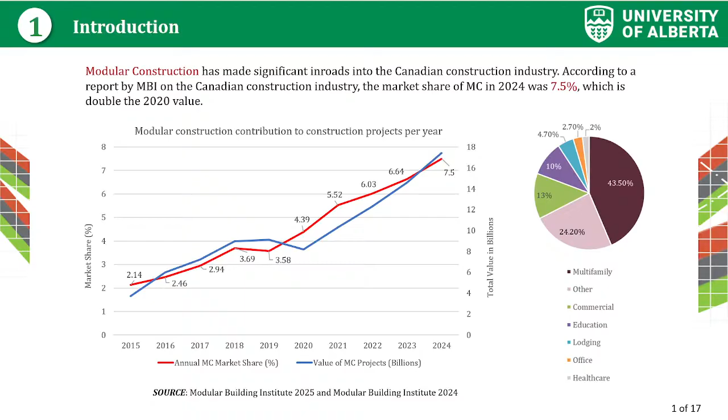To start, modular construction has made great contribution to the Canadian construction industry. According to the latest Modular Building Institute report, the market share of modular construction has reached 7.5%, almost double the value recorded in 2020. But we usually look into how we can increase this ratio from 7% to a greater value. Through the literature, we identified a lot of obstacles that can slow the adoption of modular construction.

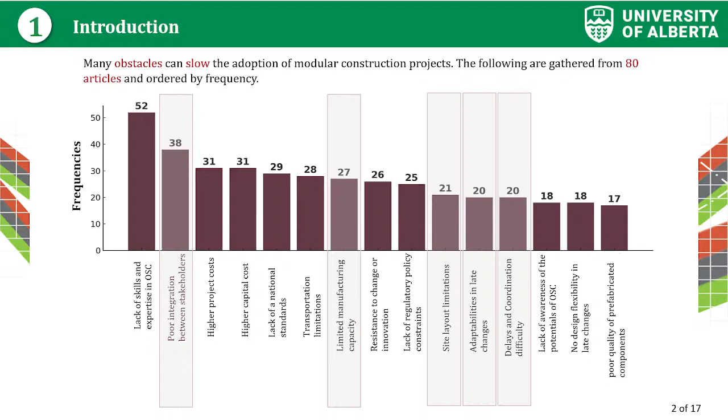Based on the frequencies, we have ranked these obstacles. We can see obstacles related to limited manufacturing capacity, coordination problems, and poor integration between the supply chain stages. All of these challenges contribute to the deviation from the actual schedule of modular construction from the planned schedule.

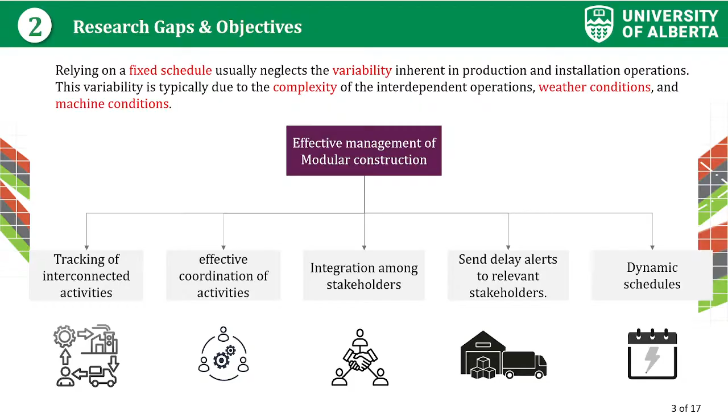In this sense, if we rely on fixed schedules, we will most likely face deviation. According to the literature, to have better monitoring of modular construction progress, we need to have tracking of the interconnected processes. We need effective communication, integration between the supply chain stages, dynamic scheduling, alerts for delays, and so on.

To this end, this paper addresses on-site rapid assembly. This technology has already gained significant traction in many countries like the United States, Singapore, China, and Australia. By leveraging highly standardized designs and factory-based production, modular construction not only supports green and sustainable construction development, but also helps the development of the construction sector.

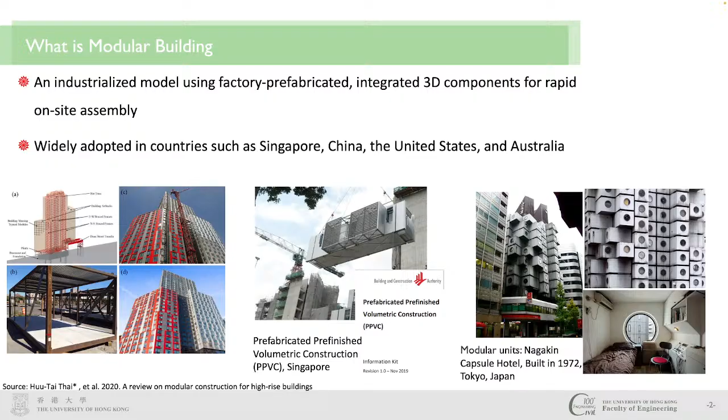In Hong Kong, this technology is officially known as Modular Integrated Construction, or MIC for short. The government has been promoting MIC since 2017, primarily to tackle two pressing challenges: housing shortage and an aging construction workforce.

And the result has been impressive. This method typically shortens construction cycles by 30 to 50%, while also significantly reducing labor cost.

The widespread adoption of MIC is already reflected in large-scale public housing developments, as well as specialized high-rise structures, all of which benefit from faster project efficiency and enhanced site safety. To give you a few project examples, such as the HKU student hostel, the Sunlight Market, and the primary school.

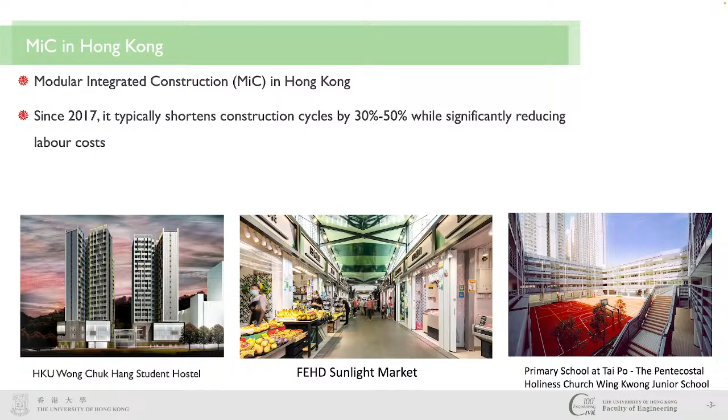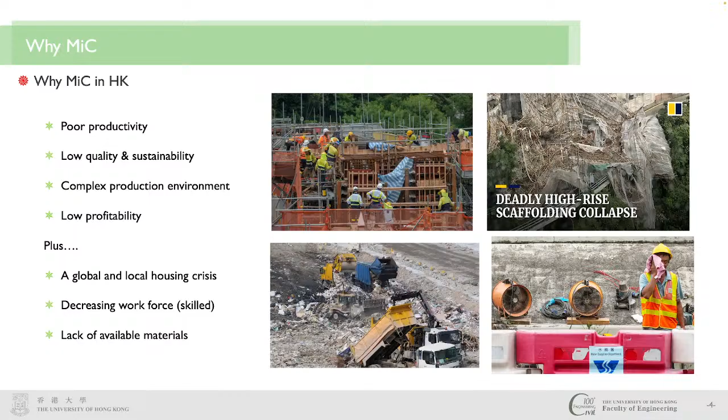So why is MIC promoted and adopted in Hong Kong on a large scale? Because the traditional construction industry is struggling with poor productivity, low quality, sustainability issues, a complex production environment, and low profitability. On top of that, we are facing a global and local housing crisis, a shrinking skilled workforce, and material shortages. So MIC can address all of these challenges head on.

So we can introduce our research aim and objectives. The overall aim is to use statistics-based models to calculate the reliability of modular building systems. Specifically, we want to capture the uncertainty and dependency within the building systems to predict the failure mode and the degradation process.

To achieve this, we have broken the work down into three main objectives. First, we classify the subsystems of a modular building and develop models to describe the degradation process of MIC buildings. Second, we identify the main failure modes in MIC buildings. For each mode, we look at the associated system, the failure indicators, and the types of failure. Finally, we collect real-world data to estimate the model parameters.

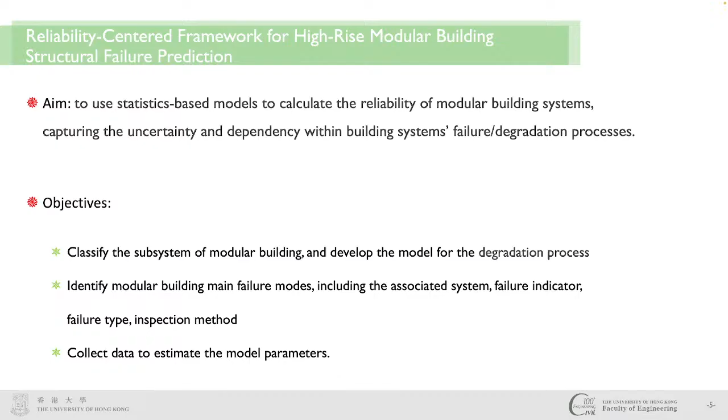First, we divide the subsystem performance into two types: structural and non-structural. Non-structural parts degrade faster but may have minor failure consequences. Structural parts degrade slower but may result in more severe failure damage.

We focus on three critical structural subsystems. First, module structural components - that's the boxes including frame, slabs, and walls. Second, the inter-module connections, which bring the boxes together. And third, load transfer zones, which transfer the zone load to the foundation.

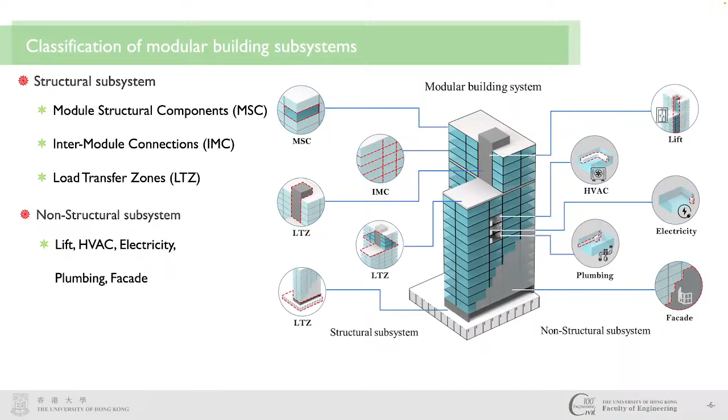Then we define a clear state space to map the component's health. We break the continuous deterioration process into discrete observable states from S0 intact to S4 failure. S4 failure state is an absorbing state - it means once it's reached, the module stays there unless restoration occurs.

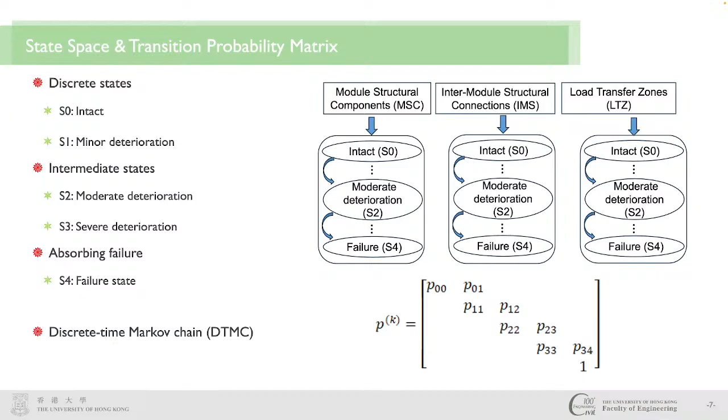The left figure shows the three structural subsystems degrading independently, each with their own states and transitions. But the structural subsystems can be interrelated, so the deterioration rate of each subsystem adjusts based on the health of the others. The primary dependency is how modular structural component states affect the inter-modular connection deterioration. There are also secondary feedback effects: connection conditions stress the modules themselves, captured by alpha IM, and load transfer zones can amplify the connection deterioration through alpha LI.

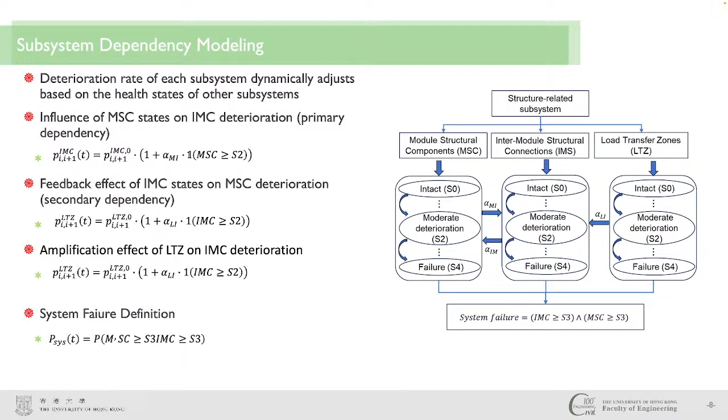Finally, we can define system failure as both MSC and IMC reaching or exceeding a severe degradation stage, such as S3 state.

So we collected real-world data to show the baseline transition probabilities of each subsystem. This is a simplified model - each subsystem can only move to the adjacent state with no jumps, and that's why all entries outside the diagonal are 0. The last table shows subsystem dependency factors, also called amplification factors.

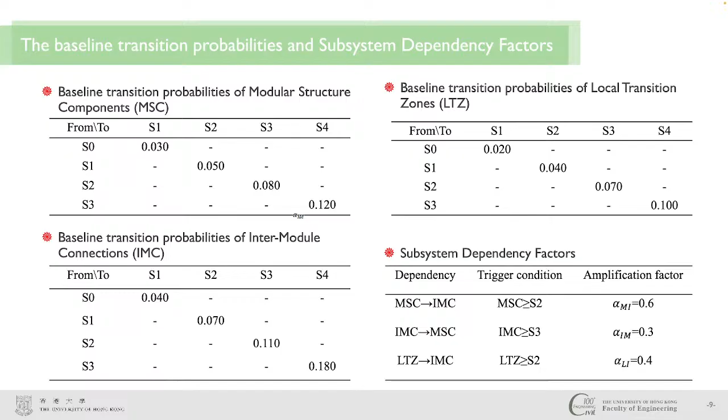A quick note: MIC in Hong Kong is still young, under 15 years. So our data largely come from traditional buildings and factory tests. The actual application will need further on-site calibration.

The left figure is the evolution of system failure probability. It shows that the system failure probability rises gradually at first, then accelerates sharply after 25 to 30 years. If we ignore these interactions, we underestimate the long-term risk by about 1.6 times at year 40.

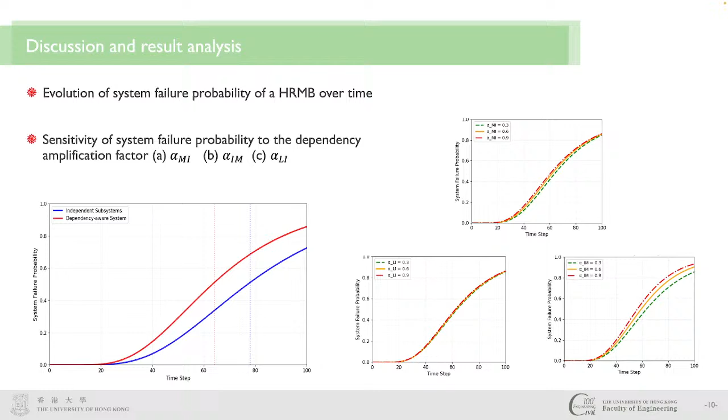The right three figures show the sensitivity analysis of dependency factors. It shows that alpha IM has the strongest impact, and overall, the uncertainties in subsystem interactions are not isolated - degradation dependencies dominate the long-term reliability. So the next step is such as...